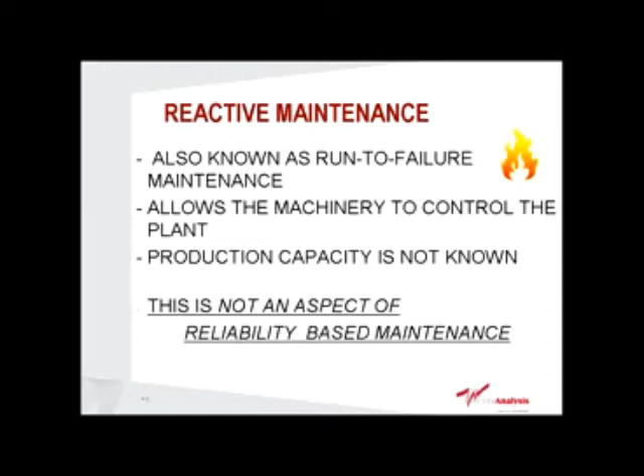First of all, the firefighters, which is the reactive maintenance. Surprisingly, I still see a lot of plants that have failures. Okay? Production capacity is not known. That's one of the problems that we have.

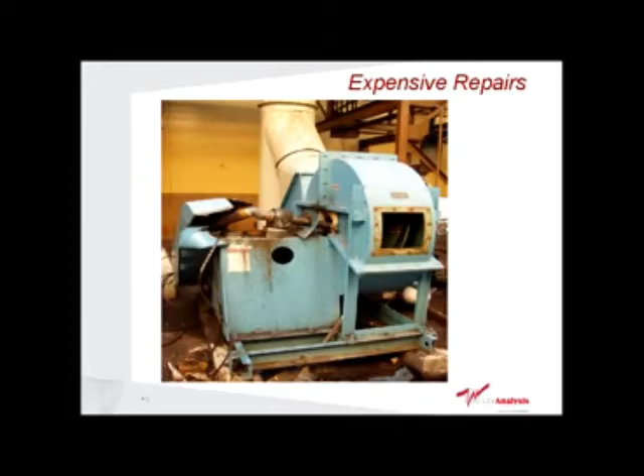We have these failures. And what's a failure? This sounds like a failure. You have seen it. When the customer calls us and says, can we repair this? Yes, we can try. But the second statement was really difficult: in 24 hours. No way. You have heard that before?

Production. This fan holds 25% of this plant. It's a tablet plant—customer, I cannot say the names. That was funny. We told them, no, 24 hours, we can only replace it. So you be in that spot.

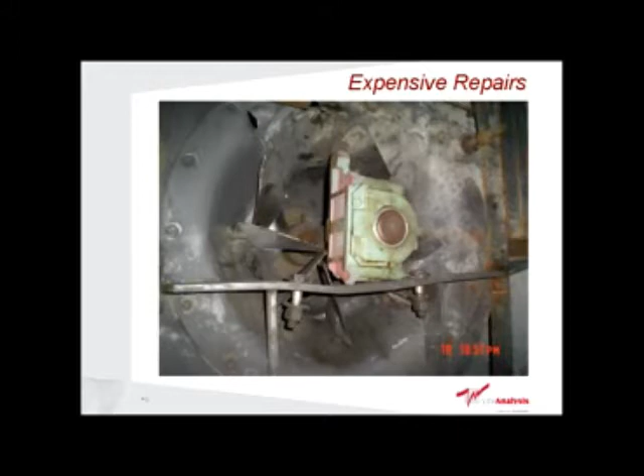Let's see the other one. Do you see something wrong with that bearing? No, no, that's what the customer told me: what's wrong with that bearing? It's just that it's supposed to be held down here. And you can see they call us around midnight because they want to repair it. Brave people. So we told them, no, it's not that easy to work with it.

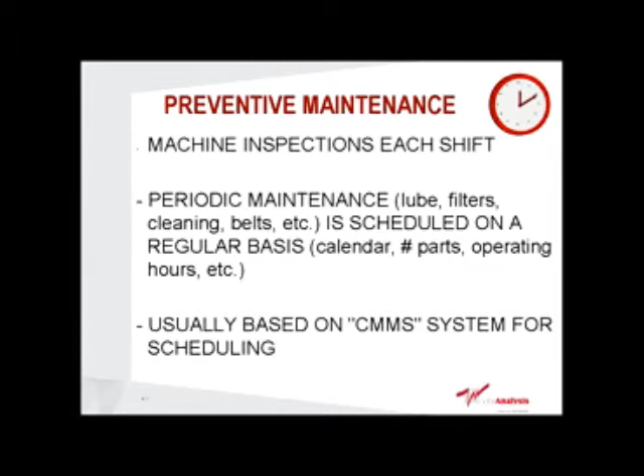So eventually we evolved to a different type of maintenance, which is, I hope most of you are working with today: the famous preventive maintenance. Every plant should have a preventive maintenance. That's what we thought about in the 1970s. Computers came up, software came up, Maximo, SAP.

And today, everybody should have a preventive maintenance. What happened with this one is, typically, it's based on time—how much the clock moves. You have a computer that sends you a message that you have to do a repair. In this case, the computer was sending a message to this mechanic to go and grease this motor. I think you have seen this one.

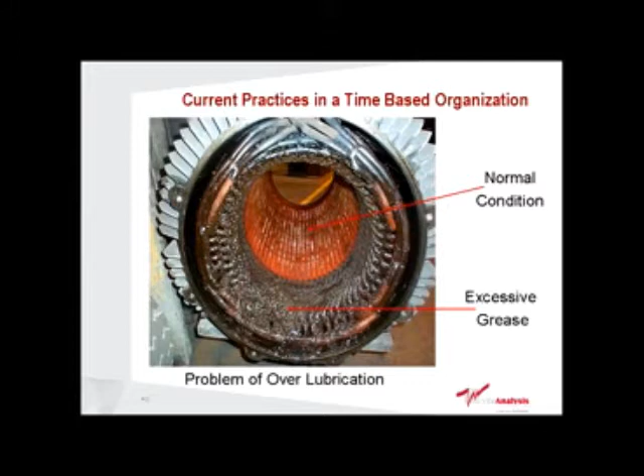That's not graffiti. In this case, everything is supposed to be red. Something is wrong there. The mechanic was doing his job perfectly—he was going every month and greasing it, checking out the PM, done. Further down, he was causing another problem.

So in the 80s, we saw these problems and we said, we cannot continue with this. We need to improve. What's next? Humans, we are always looking at what's next. So we came up with an idea. Voila.

Predictive maintenance. Did you believe that—that I can predict the future? Honestly, that was what I saw back in the Caribbean. You were safe. I was out there selling that I can predict the future. Everybody bought it at that time. It was sticky—predictive. Oh, he can predict the future. Wrong. But they bought it, and it was nice. But it was a whole different concept.

Instead of me doing a PM, which is let's do an inspection, we changed that into let's do an analysis. So we started doing anticipating—that's what we do. If I could predict the future, I wouldn't be here. You'd be seeing me through a camera. Basically, what we do with all of these technologies—vibration, thermographic, oil, ultrasonic, motor current analysis—is only anticipating problems by monitoring with non-destructive technologies.

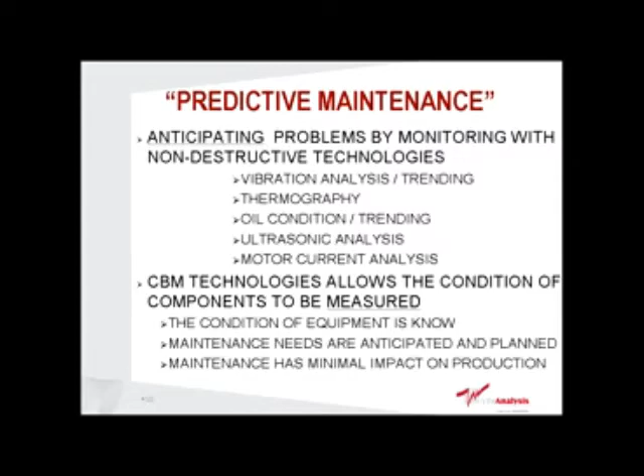Maintenance needs are anticipated and planned. If we do the planning, how many of you have a planner at your plant? Everybody should have one. But a real planner, not a purchasing guy, not a scheduler, a planner. And maintenance has minimal impact on production. All of us should be looking at production. That's our customer.

And that's where we came with a whole line of different products, different technologies, and we call them predictive maintenance. We apply all of them. Some we work with rotating equipment, electrical equipment, but we call it assets. We don't talk about equipment. Today we talk about asset because it can be mechanical, electrical, stationary, all of them. And we have to decide which of these technologies we're going to apply to one asset.

Because we are talking today, this is a key word. I visit a lot of plants, and they say, yes, we have a predictive maintenance program. Okay, what's that? We do vibration, we do ultrasound, we do infrared. But today, if something I want you to take back home is, we're talking today about integrated, meaning that we use different technologies to assess one asset.

And besides that, how do we report that asset to our organization? Because most of the technical guys, we like to do analysis. Do we like to write reports? Wrong. We need to talk to the management. Management doesn't talk about vibration, dBs, temperature. They talk about what? Money. And you need to start working with the money.

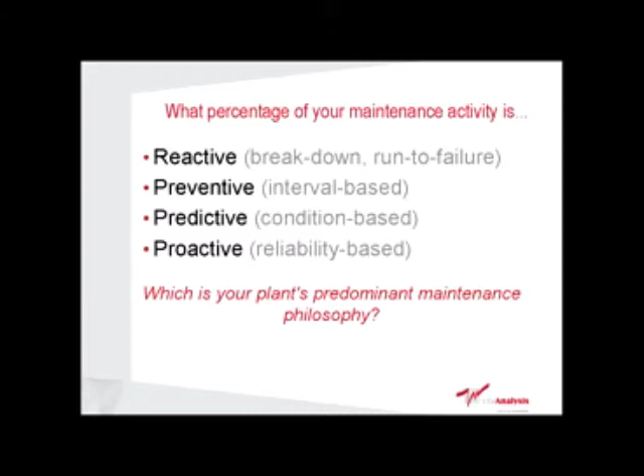Now, I have shown you three strategies. I want you to answer my question. Where is your plant? Which of those three? Which of those four? And most of you will say, well, I'm between preventive, predictive, or maybe predictive, proactive, somewhere there. Let me show you what I have seen in Latin America.

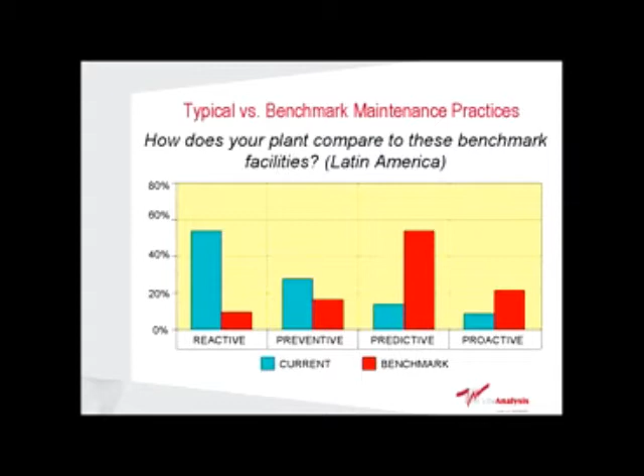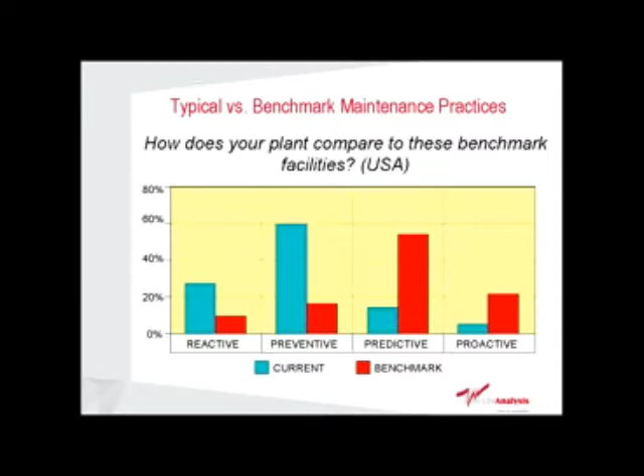Okay? Let's see how the USA is. Is that familiar to you? Are we doing a lot of PMs? Most of the plants that I visit, that I work with, know that we have a lot of PMs. And you know the next question: if you're doing that much work on PM, why do you still have failures? There's something wrong. But there is a solution for that, okay? But in this case, that's what we've seen. So that's a standard in the industry.

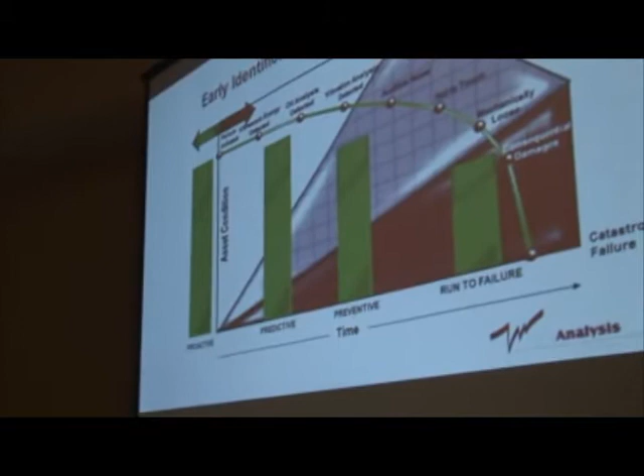Do you know that most of the failures that you have at your plant are not maintenance driven? Who is here in operations? Why do we always have maintenance people and no operations? Most of the failures that you have at your plant are operations. And you know why? Because when you go and dig into them, they don't know how to work their units, how to operate their plant. They have been doing what they were taught. That's all. They're not bad people. Nobody wakes up in the morning and says, I'm going to wipe out a bearing today. No. It's just that we have been concentrated here, but we need to start working on the root cause of our problems. Major offenders. And that's how we work here.

I'm not going to talk about this place because it's obvious. Do we know what consequential damages are? If we have a deviation, I like to talk about deviation. The ball bearing has a fault, has a problem. If we let that ball bearing continue working, what's going to happen? It's going to damage what? Shaft, housing. Those are consequential damages. So in this case, we can save so much more money here than down here. In our case, we are looking at working on predictive.

During the 2000s, it was said that the company that by 2010 does not have a CBM, condition-based maintenance program, will not last. Believe it. It's the truth. Today, if you don't have a condition-based maintenance program at your plant, you're not going to last. Because I'm working with your competition down in South America, down in the Caribbean, and they're doing it. Everybody has to have this.

Okay? But once you're here, you will start saying, what's next? The what's next is, how do we do this? Proactive. That's where we are today. Looking for the cause, the root cause of the problems. After being the leader, in this case, for 16 years, it's always asking, what's next? Today we have a lot of plants where we have our CBM program. Then we started with the reliability area. If you're here, it means that you have heard that word. Okay, what's reliability then?

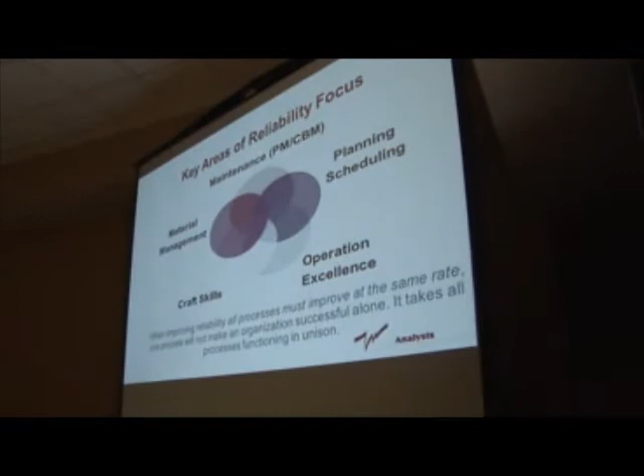That's my background, maintenance. Let's work with the maintenance part. Let's work with the CBM program. Let's get that CMMS program sharp, working. But what happened? If I don't have planning and scheduling, what happened with all of those diagnostics that you did? We do a lot of: you have this problem, check this, lubricate, repair. But if it's not done, you know what's going to happen?

Most of our customers say, well, if you're doing those analyses monthly, let's do it now bi-monthly, because we cannot repair. Oh, hold it. Does that make sense? Because I have others that say 2 months is not enough, I need 3 months. So that's where we start doing deviations of the program, because we don't have planning.

But what happens? The other one is that I need to do a repair. I know that I have to replace that electrical motor, but when I go to the warehouse, the electrical motor is not there. Voila, we go back to square one. So now you see that if I'm doing this, but I'm not working with this or working with this, nonsense. Believe me, I have suffered. But the worst part comes, it still doesn't end. Let's go to the next level.

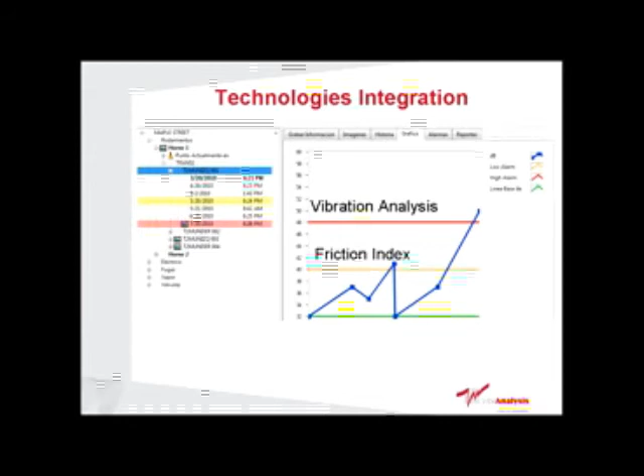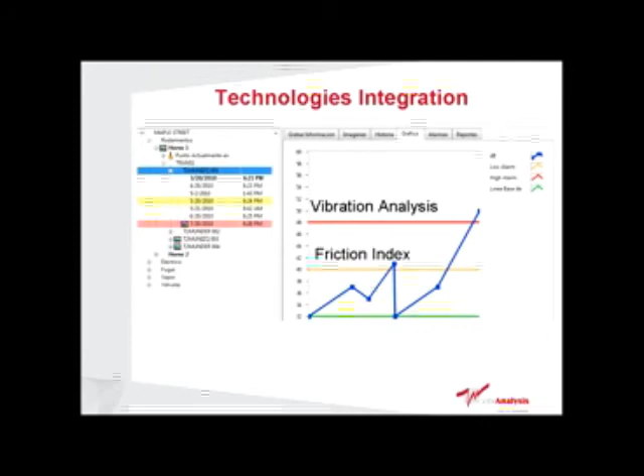Yes, sir. How do you determine your frequency between your ultrasound reads? Is that monthly? Is that what determines when and how frequently you do that? Good. In this case, we're doing monthly readings. Every month, because remember, we are coming from systems that are doing monthly vibration data collection. Okay? And in this case, vibration takes more time.

I need a more knowledgeable person to see that vibration. With ultrasound, which is something additional that we're looking at here, we're looking at using a common person who knows data collection, and ultrasound is much easier to analyze than vibration. So we're doing monthly readings so we can avoid the vibration analysis. Here.

To what level of breakdown issue do you actually do a root cause analysis? Does it have to be a major event, or do you do it for something as simple as a prox switch failing? Can you give me more about your question? When you decide to do a root cause analysis on a piece of equipment, does it need to be a major event, a hydraulic pump fails, that type of thing, or do you get right down to small events, such as a prox switch that fails?